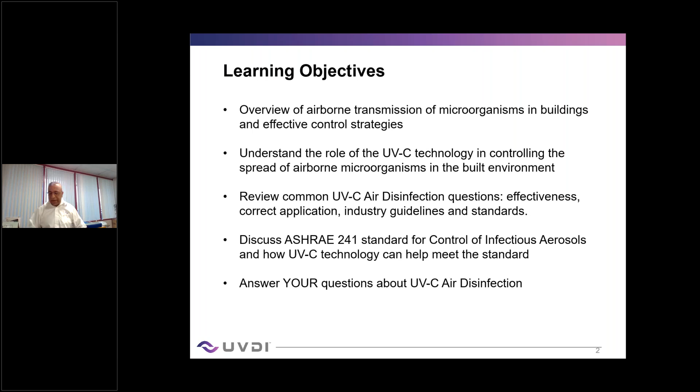So before we get going, I would like to do a quick poll, and I'll hand it over to Dave to run that first poll related to this. Thanks, Ashish. As you can see, our first poll is going to be, what do you see as the greatest benefits of UV technology? And please select your top two. I'm going to launch the poll here, and you'll be able to respond. I'll give you about 15 seconds or so. So please select the top two, and then we'll review the results.

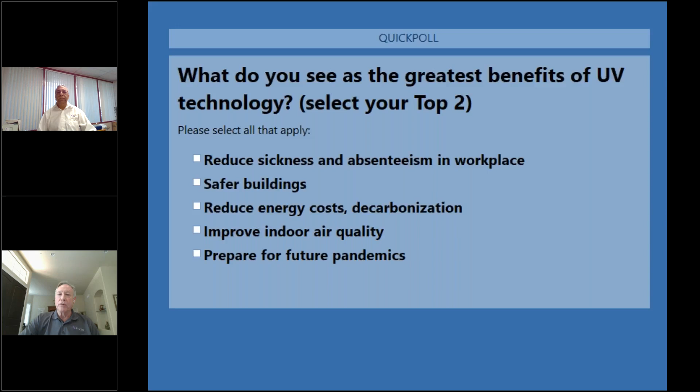So as we can see, top one, improve indoor air quality as one of the top benefits that you see for the use of UV technology, with reduced sickness and absenteeism right after that, but a good mix of all of the items that are here. And these are topics that Ashish is going to be covering throughout the presentation. So I'm going to close out the poll and turn it back over to Ashish.

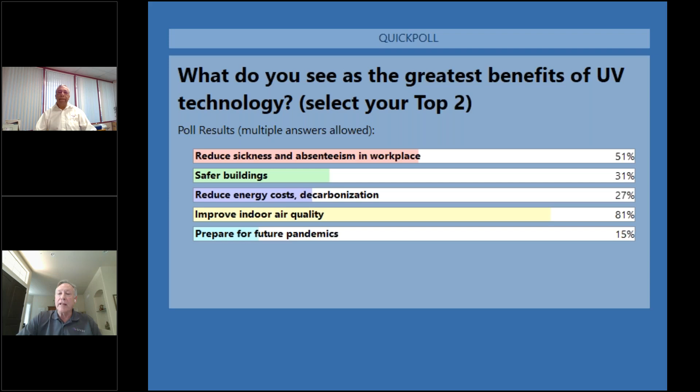Thanks, Dave. And actually, this was a really good response and good understanding, because when you go back a few years, even before COVID, UV technology was always like a value add or a value proposition, and it was more about, okay, am I saving energy? Only then I'm going to apply UV. But now the focus has shifted, and people are more concerned about indoor air quality. It has really come center stage, and of course, affecting the sickness and absenteeism at the workplace.

And I think the reason is, when you go back 40, 50 years ago, indoor air quality was not so much of an issue because we were naturally bringing in fresh outside air and diluting the concentration of the biological contaminants and chemicals that were trapped inside the building envelope. But now that we are spending more time inside, and the buildings are being built so tight, and we're not bringing in enough fresh outside air to dilute these contaminants, it's becoming a concern. Studies have actually shown that the air inside our homes is 2 to 5 times more polluted in terms of biological and VOCs and odors compared to outside.

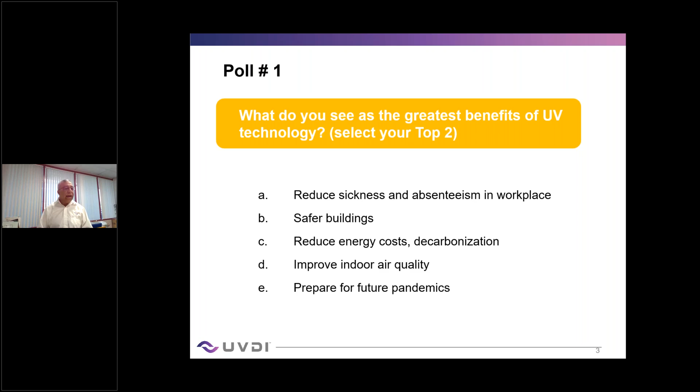So to understand the transport mechanism of these microorganisms, we need to understand the size. So this air contaminant chart shows relative sizes of the different types of pollutants which are found indoors and outdoors. If you see the scale of this chart at the bottom, it's in micrometers, which is 1,000th of a millimeter. So when you compare it to the size of a human hair, which is around, say, 60 to 100 microns, spores are big in size, 10 to 30 microns. Then you have the bacteria, which ranges from 1 to 10 microns, and the viruses get into the less than 0.1 micron.

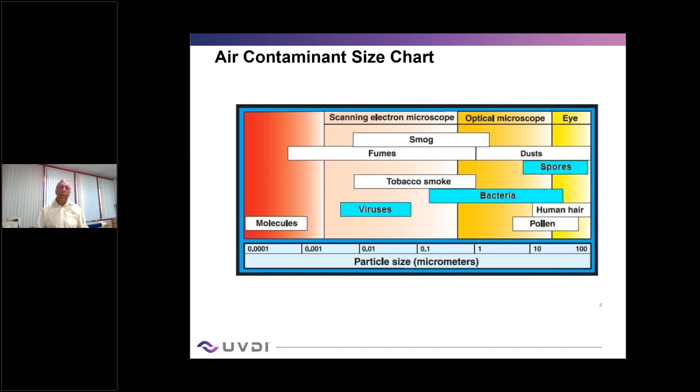So there's several studies which talk about what are the microbial contaminants in buildings, and this is a list which has been generated from all the studies. And you can see pretty big names there. I'm not going to read all of them, but there's a whole category of bacteria. Some of that stuff is coming from outside. Some of it is growing inside the ductwork. Some of it is growing in the coil. Viruses are, of course, coming from outside and being circulated inside the building as the occupants may be infected and the air is circulating. And of course, hopefully, the mold and fungus is only coming from outside and not from inside. But Aspergillus niger is really at the top of the list, where we've heard of some hospitals which have closed down because of Aspergillus niger outbreaks.

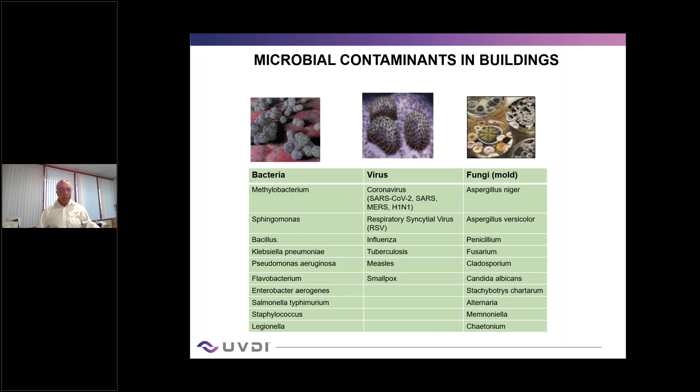Then, of course, we have SARS. So initially, people were saying that SARS is only surface, and then there was some concern about, is it really airborne? But since then, there have been several studies which have shown that SARS-CoV-2 can actually be transported and transmitted through the HVAC system. The presence of SARS-CoV-2 has been reported at several locations along the HVAC system in the air return and supply pathways, including multiple locations in the air handling units.

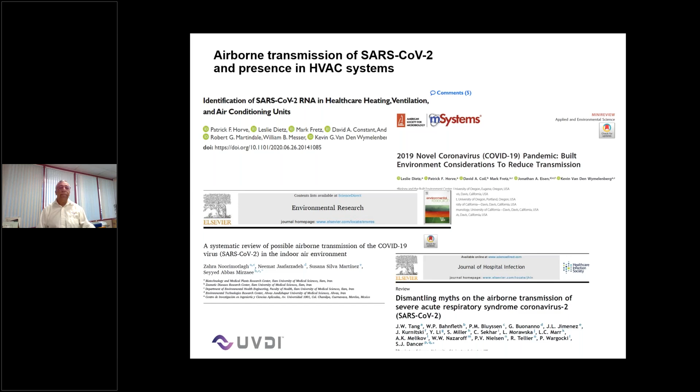So when you look at the different vectors of microorganism transmission inside buildings, again, like I said, there are different particles and the mode of transmission is different. Airborne transmission is mainly due to aerosols, where the small particles are carried and transported by the air currents to large distances and linger in the air for long periods of time.

Droplets, which was initially the case, droplet transmission is typically short distance, where droplets are transmitted as projectiles to people, surfaces, and objects only in the immediate vicinity. And I think the rule of thumb was 6 feet, and that's why we had that 6 feet distance rule proposed by the CDC. So droplets don't really linger in the air, and the size dictates how long they can remain suspended in the air. But these droplets can really dry out, and as they dry out, then you have the aerosol which gets transmitted.

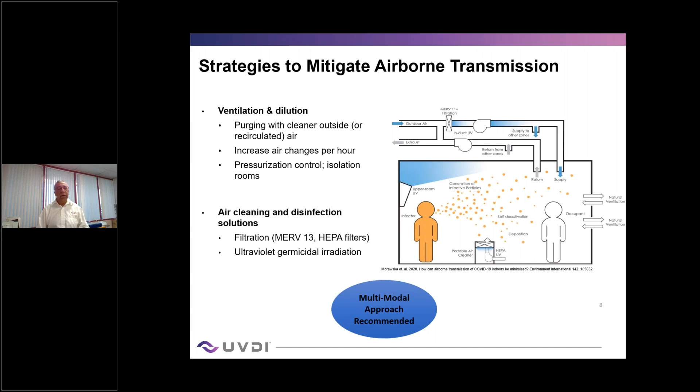So Pacific Northwest National Lab, which is affiliated with the Department of Energy, has been evaluating GUV over the past couple of years heavily, and you can see some of their communication on the internet. And they've recognized that GUV offers benefits as a more effective and energy efficient alternative over increasing ventilation loads above code limits. So 62.1 gives you a basic ventilation limit. This is what you need to have, and that's kind of prescriptive.

But if you need to go above that for any control of infectious aerosols or to get a higher air quality, you need to look at other technologies. So what GUV offers is an alternate to increasing your ventilation load. So you provide the code level, maybe you don't have to go above it. So use GUV as a more effective and energy efficient alternative to, for example, disabling demand control ventilation.

There is also a decarbonization opportunity, especially in northern climates. If we can avoid increasing the amount of outdoor air that we're bringing in above code, that's directly related to fossil fuel heating. And for those out there that may be involved in building electrification efforts, we see a potential benefit of this technology as well, whereby reducing the outdoor air ventilation load, you're going to reduce the required size, cost, and infrastructure requirements of, say, a commercial heat pump, potentially making that electrification measure to replace a fossil fuel heating system with an electric heat pump a more cost-effective solution.

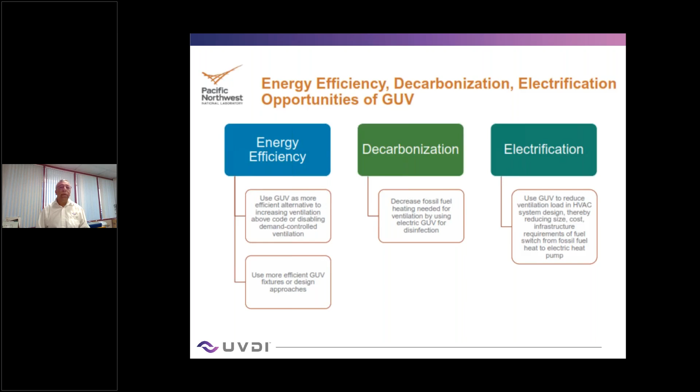So there are numerous published studies demonstrating the effectiveness of UV technology in improving air quality by disinfecting the airstream, whether it's in the duct or at a room level. So here you can see the applications. Of course, cooling coil disinfection has been the first and the foremost application for applying UV inside buildings because the cooling coil harbors a growth of both bacteria and even mold.

Air disinfection solutions for UV can be applied inside the central air handling system or inside the duct. So if you don't have the space or you're only focused on a certain part of the building, then you would just install the UV system in the duct. And then at a local area or a room level, there's upper air UV and ceiling mounted UV, which has been used. And of course, the advent of room air purifiers, which include UV as a technology, is also used.

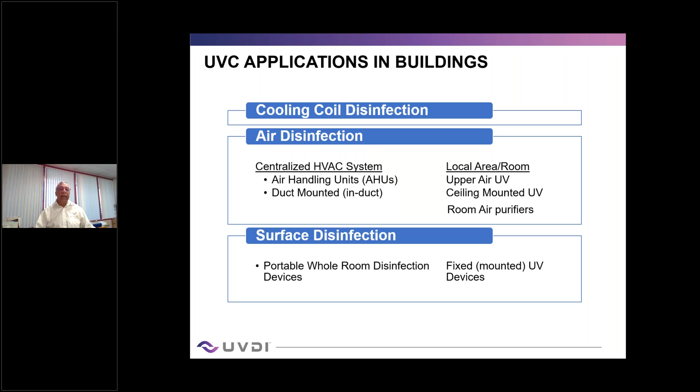And then inside buildings, especially in healthcare, you have portable whole room disinfection devices, which go in and treat the whole surfaces of the room. Or you can mount a UV in your ceilings or on the walls to get the UV disinfection. So here are some pictures. This is a cooling coil, and you have a UV system in front of the coil, which could be designed to just treat the coil, or to treat the air, or both. And this is a picture of how lamps could be installed inside the duct, where the lamps are ideally placed parallel to the duct.

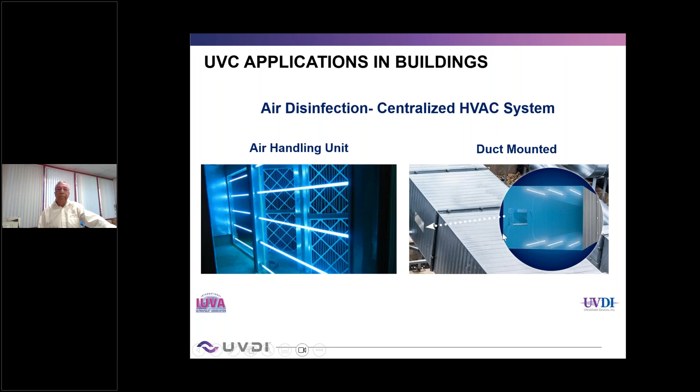Here's a picture of an upper-room UV application where you can see that the UV fixtures are installed only above 7 feet in a room, and they're only shining in the upper part of the room because UV is harmful to eyes and skin. So there are louvers on these fixtures which are only focusing on the upper air of the room and disinfecting the air on the top.

Or you could have ceiling-mounted UV lights. Depending on the wavelength you have, you would have to have effective safety interlock switches to turn them off as needed, depending on the occupancy in the room.

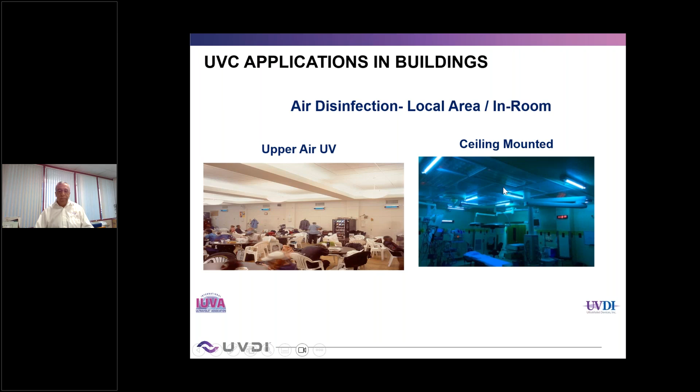Okay, you can see the poll here. The question is going to be, do you currently use or specify UVC for air disinfection? And we have representatives from users, owners, facility management, as well as engineering firms and distributors. So it could be a different type as far as whether you're specifying or selecting. And we want to just get a sense of that. So I'm going to share the poll, and we'll have about 10 or 15 seconds. And please select one for this poll.

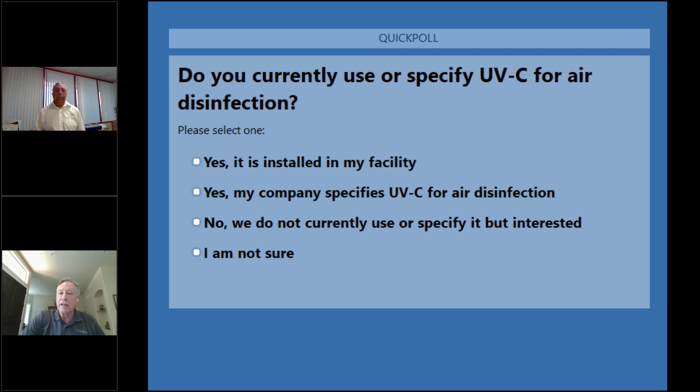Okay, so it looks like number one, yes, my company specifies UVC for air disinfection. Great to see. Yes, and we can see about 13% do have them already installed in the facility, and a large percentage that are not currently using but are interested in. And we're hoping the information we provide for you today is going to help you answer any questions you might have related to that. And also, for those of you who are not sure, that's really the main purpose today for us, is to give you as much information as we can to help you understand the value.

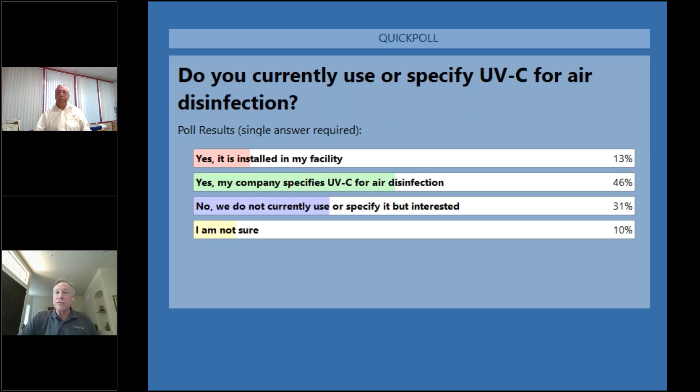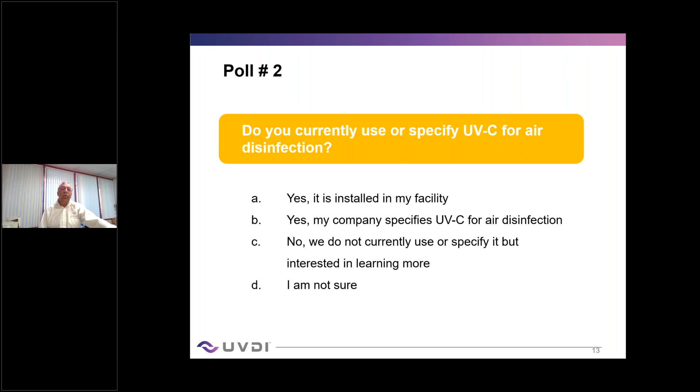Right. So that's a good mixed response from the audience, and hopefully the next few slides will help people who are new to UV and people who are not sure about how to specify UV, and give some high-level information. And of course, later on we can get into more details on a one-to-one basis.

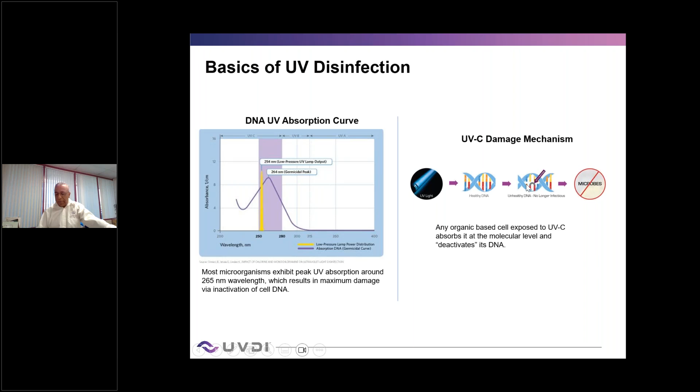The mechanism is pretty well documented and proven: if you look at the DNA or RNA structures, when UV light shines on it, it basically breaks one of these bonds inside, and it prevents the DNA from replicating. So if it stops replicating, the cell basically dies and cannot reproduce anymore.

So there are so many studies out there, and since it's a proven technology, I don't really have to get into too much detail on this, but there are several studies which have correlated the benefits of UV technology to workers' health and well-being. There have been studies done by EPA, a couple of studies in the last year by the EPA Indoor Air Quality Group on UV. The World Health Organization, CDC, they all have documents and guidelines to prevent the transmission of tuberculosis. And then, of course, when SARS-CoV-2 happened, there was a flurry of research activity confirming that UVC is effective against SARS-CoV-2 and similar viruses.

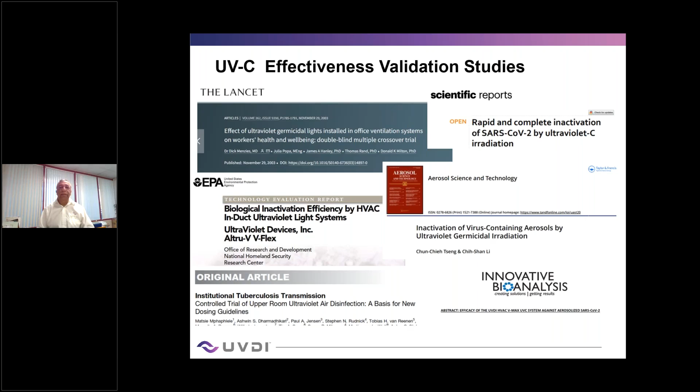So while the DNA structure is damaged by UVC light, the susceptibility is affected by the unique shape, sizes, cell structure. All these microorganisms are different. So it's not just the size, but it's also the photochemistry, the cell chemistry on absorption. So even though they're all affected by UVC, relatively, some are easier to kill and some are more difficult to kill. For example, viruses are, I would say, easiest to kill, followed by bacteria and then mold.

So if you look at these, what is the UV dose required for a 99% kill or inactivation? And you look at these numbers, you can see SARS-CoV-2 actually is one of the easiest to inactivate compared to other microorganisms. And the studies which were done in the past few years have confirmed that you just need, say, a dose of 1222 microwatts per centimeter square to get 99% kill for SARS-CoV-2.

And we've always been modeling our airstream disinfection system using influenza because every year we have the seasonal flu, and that really requires a much higher dose compared to SARS-CoV-2. And then bacteria and mold, of course, the mold is orders of magnitude over this. So they are susceptible at different degrees. So when you look at how do you size a UV system, you have to really look at, am I sizing it for viruses or am I sizing for bacteria, or do I really want to size it for mold? So it's important to understand that.

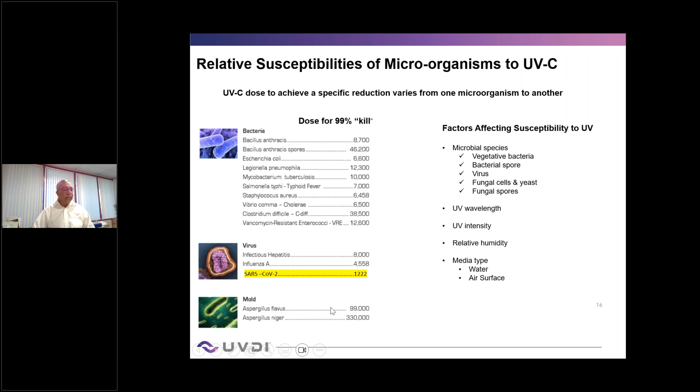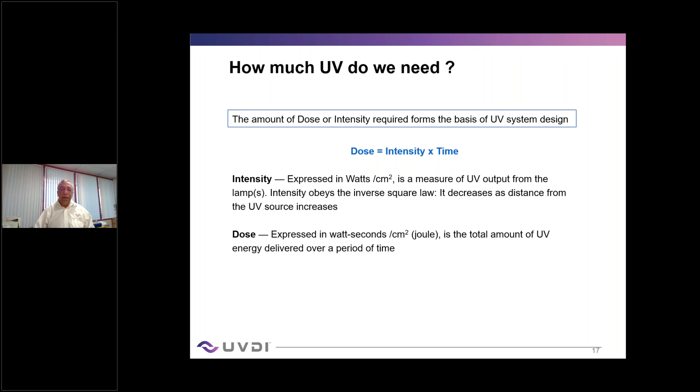So which brings us to the most important parameter which you design a system to, and that is the dose. The UV dose is the single most important requirement. The dose applied is the cumulative intensity reaching the target area multiplied by the exposure time. So to increase the dose, you can either increase the intensity by increasing the number of UV lamps, or you can increase the exposure time or dwell time. Keep in mind that in an airstream application, air is moving pretty fast at, say, almost 400, 500 feet per minute. So your exposure times are less. And we'll get into that a little bit later.

So here's a quick summary of the main differences between a coil and an airstream disinfection. In coil disinfection, you have a coil and the lamps are just in front of the coil, and you have pretty much an infinite amount of time to disinfect it. So you don't need a whole lot of UV. In fact, the ASHRAE guideline says that if you can have an average intensity of 50 to 100 microwatts on the coil surface, that's fine, because these lamps are on 24/7, and the light will focus on the coil, penetrate through the fins and take advantage of the metallic reflectivity inside the coil to get to that higher dose level over time.

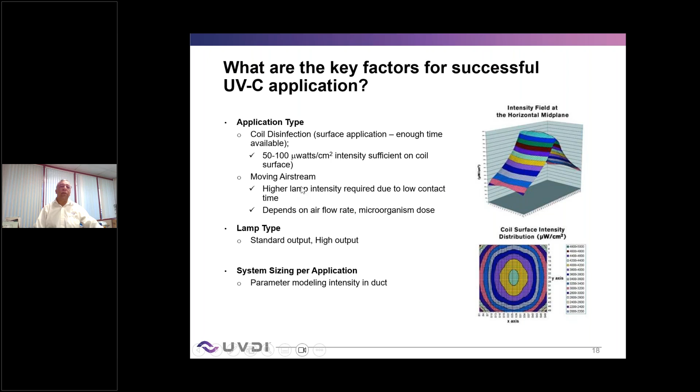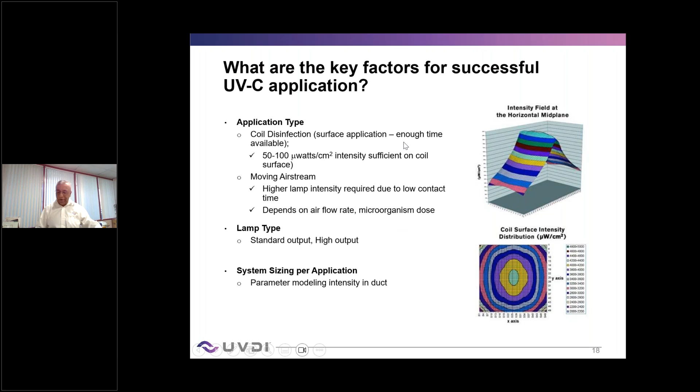On the other hand, airstreams, like I said, 400, 500 feet per minute in the air handling system, or even up to 1,000 feet a minute or higher in the duct, you don't have that much exposure time. So when you look at sizing a system, it's not the same. Of course, you have to look at the lamps. Some lamps have lower output than others, and that will have an impact on the energy. So for a coil application, you can decide which kind of lamp is more effective. Maybe you need 10 lamps which are standard output, but you can do the same thing with 2 lamps which are high output. So you can design it different ways. So modeling a system is really useful in figuring out the best way to design the system for that application.

So ASHRAE formed an epidemic task force during COVID, and as a result, they came out with some standard guidelines for how much UV dose you need for in-duct air disinfection, and what dose you need for SARS-CoV-2. I showed you the number in that susceptibility chart for SARS-CoV-2, it was 1200, but basically what they're saying is if you have a minimum of 1500 microwatts of UV dose applied in a 2 feet region, that would be sufficient for sizing the UV system for airstream disinfection.

And over the last couple of years, CDC has come out, and I wouldn't say endorse it, but they've updated their ventilation guidelines, and they talk about using UV as an effective mitigation strategy. So they talk about in-duct UV as well as upper air UV as an effective mitigation technology.

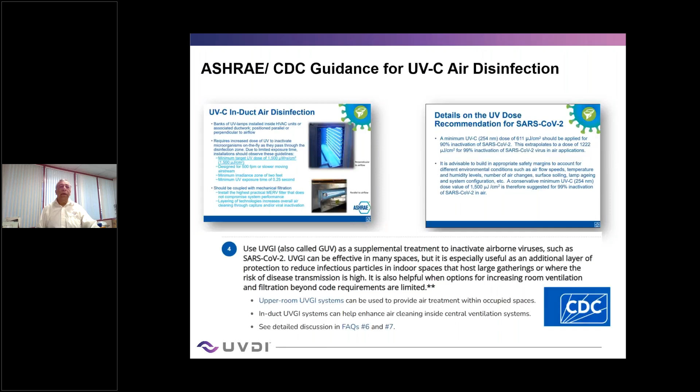So time to do another poll, Dave. All right, thanks, Ashish. Okay, on this poll, the question is, when you're looking at using a UV system, how do you specify that? You follow industry guidelines, you have a system provider representative that you work with, you hire a consulting engineering firm, you might have another way, or you may not actually be specifying it yet. I'm going to launch this, and we will go about 10 seconds. So please provide your response to this one.

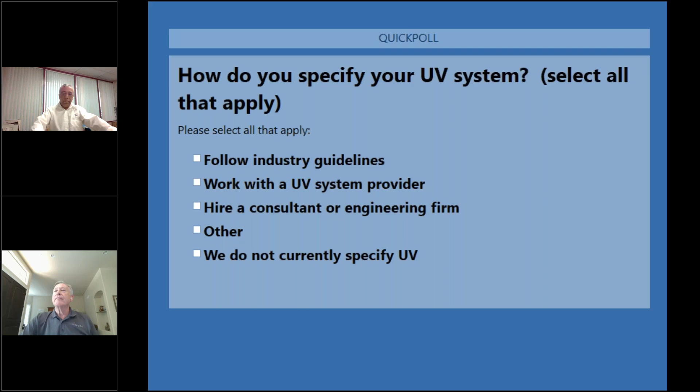Okay, I'm going to close and share the results. So it looks like over half use a UV system provider, work with a representative or perhaps engineering firm, and then followed by looking at industry guidelines. And then we do get a good sense of people who are not currently specifying them. Again, the information we're providing today, we're hopeful that you'll be able to use that. I'm going to close out the poll and turn it back over to Ashish.

Thanks, Dave. So I think what we're finding is the pandemic unfortunately spawned a lot of new startups and companies who have provided unvalidated systems and misapplied the UV. So we've seen specs which are really designed for coil disinfection, but the claims have been made that they will also do airstream disinfection, which is not really true.

So for illustration purposes, this example below, like I said, ASHRAE says for a coil application, you just need, say, 100 microwatts. So if you have 100 microwatts, and you look at an airstream application where the air is moving at 500 feet per minute, that applied dose is only 24 microwatts, whereas the target is 1500. So there is no way you can get the dose you need to get a decent amount of UVC disinfection for airstream. Even if you go 10 times, 100 to 1250, your dose is only 300. So it still falls short of what you need for air disinfection.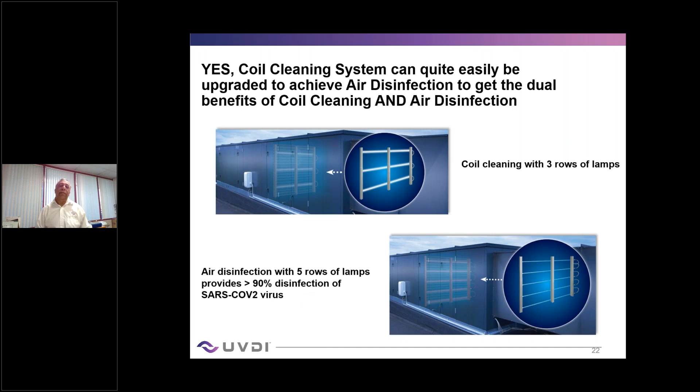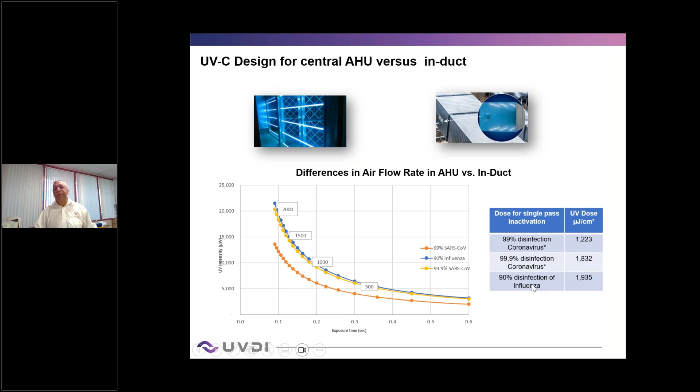So what are the key parameters that impact UV intensity? We talked about microorganisms. There are some new technologies out there with different wavelengths, so you want to make sure that the system is sized for the output of that lamp, whether it's an LED or far UV or some other UV source. The configuration of lamps in the space, and wind chill is important.

This graph shows that the velocity in the duct and the air temperature in the duct has an influence on the lamp power. So when manufacturers like us are designing systems, we factor in the temperature of the application, installing it close to the coil where the temperatures are different compared to something way downstream of the duct. The humidity levels and the reflectivity available in the duct also have an influence. So all these parameters are important.

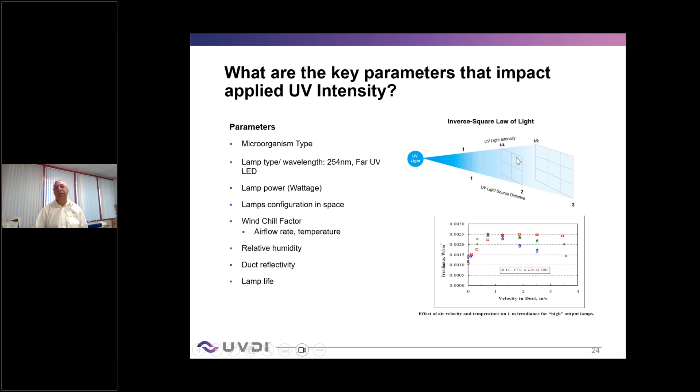And the most important thing is, like any light technology, UV follows an inverse square law. You go further away from a light source, the intensity drops. So if you go twice the distance from a light source, the intensity drops to 1/4, and so on and so forth. So modeling is important.

You can't just say, okay, I got so many lamps and this is my total output which I'm sizing. It also depends on how you're placing the lamp. So the modeling really helps figuring out what is your intensity or dose profile inside the duct. So here's an example which shows that here the lamps are spaced evenly along the duct. So these are in the corners and you get a fairly uniform profile versus if you bunch all the lamps in the center, your distribution inside the duct is much narrower and not uniform.

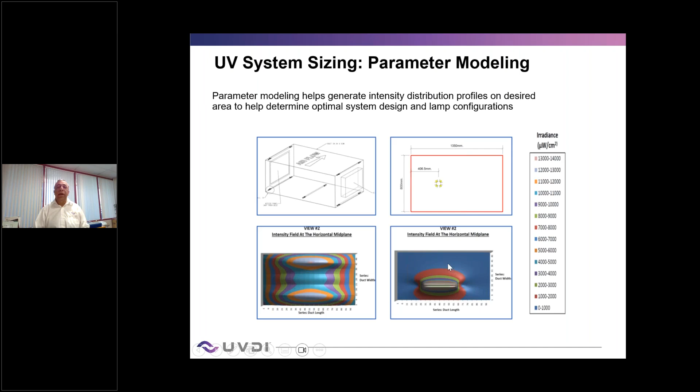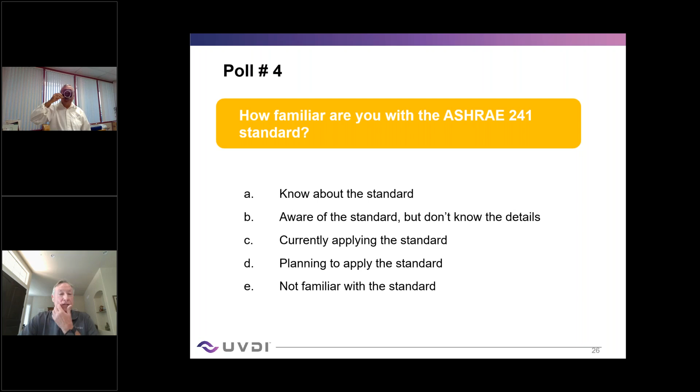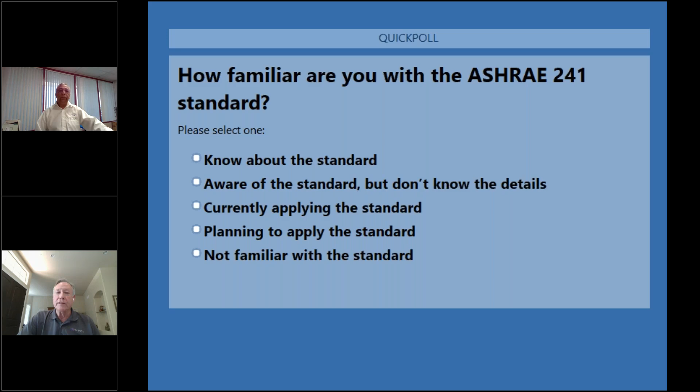I see the responses coming in. It's great. Okay, we are going to close out and I will share the results.

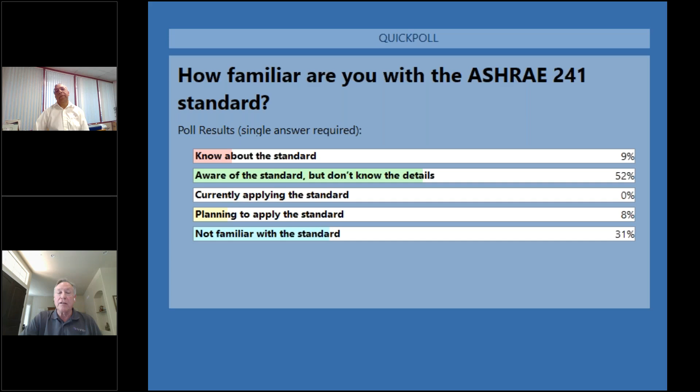So it looks like over half were aware of the standard, but don't really know the details. And I think that's a typical category right now with it. And we do have a good percentage not familiar with the standard. So the purpose of the rest of Ashish's presentation is high level. There's a lot of details in it, and we're going to brush on the top of it. But it looks like most everybody knows of the standard. So that's good to see. I'm going to hide the results now and turn it back over to Ashish.

Right. Thanks, Dave. So yeah, this ASHRAE 241 standard was a really high priority effort from ASHRAE, driven by a request from the White House, and they formed a committee of really highly respected committee members, and they came out with the standard for the control of infectious aerosols in buildings. Until this, there was no standard on what building owners do to combat any infectious aerosol in a building and transmission. There was nothing out there.

So this standard was fairly quickly put together in a very concise way. So what it does is it establishes minimum requirements. What ASHRAE does, like some of the other standards do, they always establish minimum requirements. So what are the minimum requirements for control of infectious aerosols to reduce the risk of disease transmission in occupiable space of new and existing buildings? So it's a pretty important purpose.

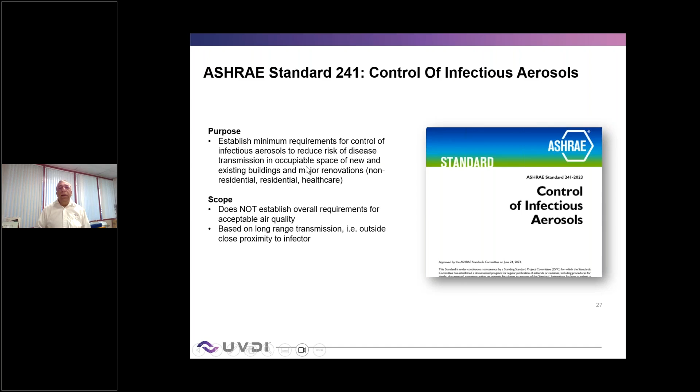So it's different from 62.1. It does not establish overall requirements for acceptable air quality. It's only focused on reducing the risk of disease transmission. If you really want to get into the details of 241, there are many presentations which you can access on the internet, YouTube, and Dr. William Bahnfleth and his team who spearheaded 241 have been really putting the word out. And there's also an ASHRAE learning webinar available on demand, which you can go and get learning credits for 241.

So some of the basics, important things are, it does not replace, it builds on the standard 62.1 for commercial buildings, 62.2 for residential, and 170 for healthcare buildings. So that's your baseline. So it says you got to meet all these requirements, and then on top of it, you need to put ASHRAE 241. And the main thing which is highlighted in blue is that infectious risk management mode. It provides additional ventilation requirements for periods of elevated risk.

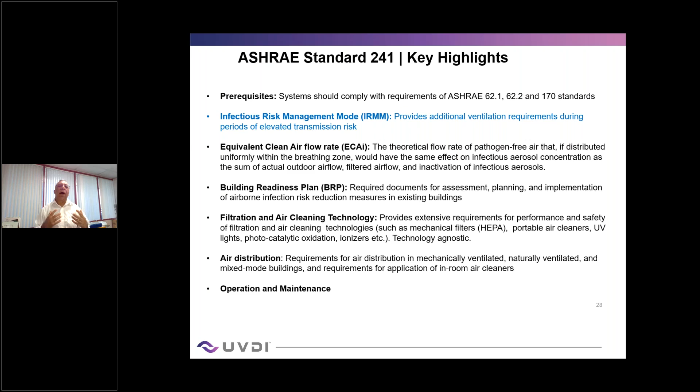And the metric which they're using is called the equivalent clean air flow rate, which is the theoretical flow rate of pathogen-free air that would have the same effect as bringing in fresh outside air. So it brings you the concept that you don't have to just rely on outside air. You can replace that outside air with maybe more energy efficient ways than just bringing in outside air. And then it gets into a little bit more details. Buildings need to have a building readiness plan, and then it goes into the different discussions on what are the filtration air cleaning technologies and how do you measure that, how do you calculate those things.

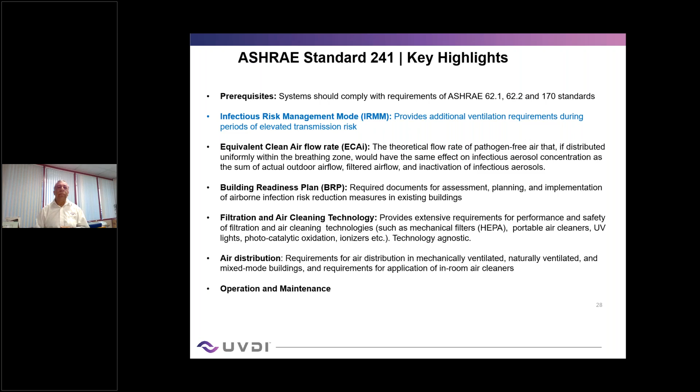So the important thing is, in a risk management mode, your occupancy could be different. So for example, when we were all working remote, you don't have to run that building full-fledged, right? The occupancy is less when people are working remote. So when you design your system to meet 241, you have to look at what is the occupancy. So what they've done is that they've said, okay, the equivalent clean airflow calculation is going to be based on your design occupancy, number of people present in the breathing zone.

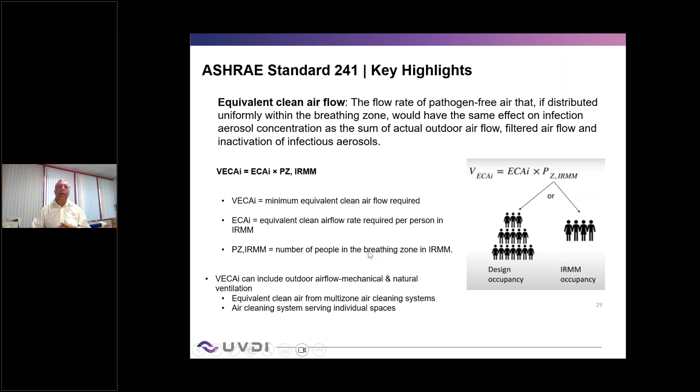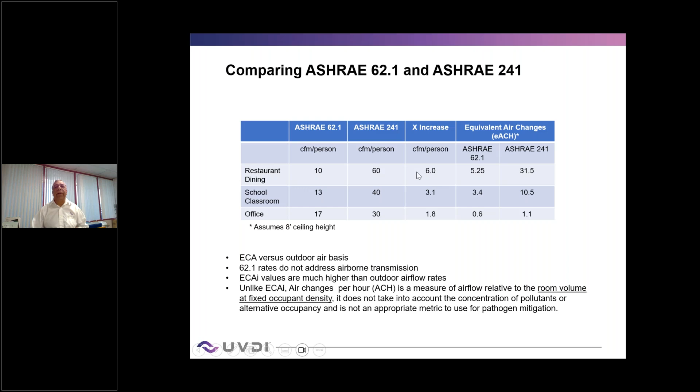So you can see that the increase is pretty significant. For a restaurant application, it's six-fold. And the columns on the right show you the equivalent air changes per hour related to that. So 62.1 does not address airborne transmission. 241 does. So you need to take that into account.

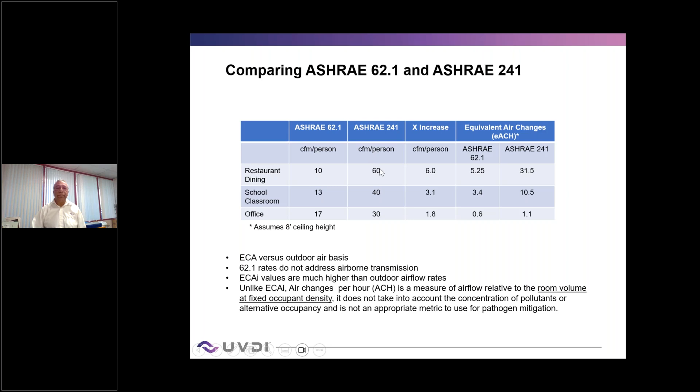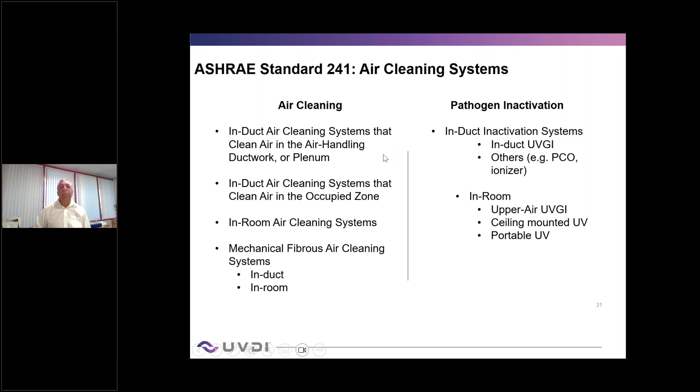So what 241 says is you can replace the outside air by a combination of different technologies. You can have in-duct air cleaning systems, filters, and in-room air cleaning systems, filters, or you can do pathogen inactivation by in-duct UV, which we just talked about, or in-room UV using upper air, ceiling mounted, or portable air cleaners employing UV technology and other technologies. So it allows you to reach that equivalent clean air goal by combining these systems.

And in addition to performance, they say, okay, how do you test your system to make sure that you meet the equivalent clean airflow rate? So they've chosen a microorganism, which is MS2 virus, which has to be tested according to whatever available standards there are. So for UV technology, for airstream in a duct, it's 185.1. And for a room, they have something in the normative Appendix A.

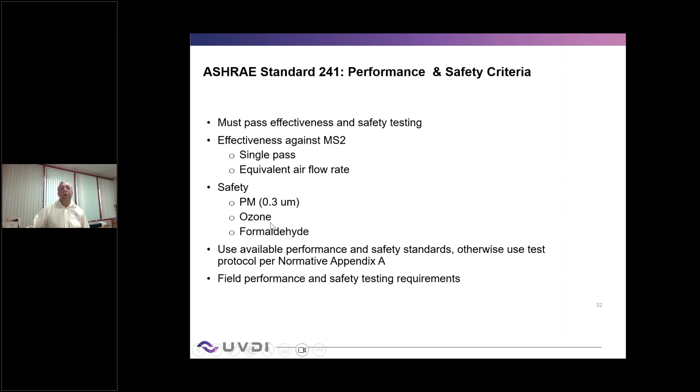And then in addition to performance, you have to look at safety as well. So whatever system you apply, make sure you're not exceeding the limits for PM, ozone, and formaldehyde levels as defined in the standard. They also show a calculator where you know what is the outside air, and then you can look at the contributions of the different technologies, sum them up, and it will tell you whether you pass or fail.

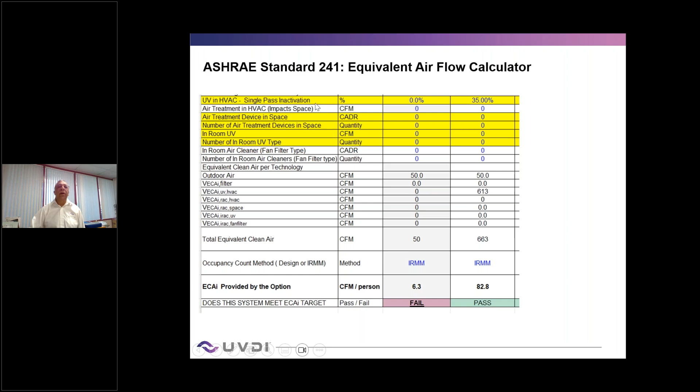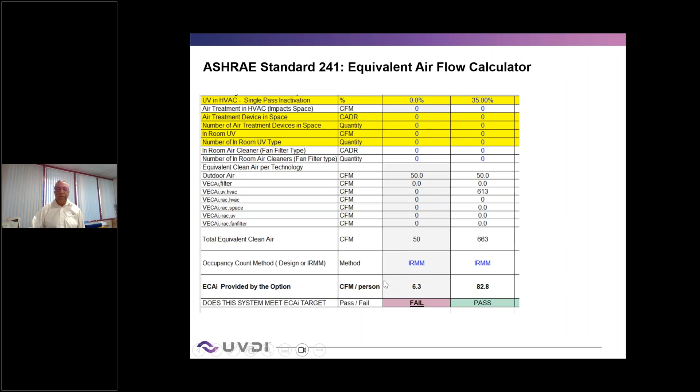So in the calculator, it says, okay, UV in your HVAC system, in your duct, what is your single pass inactivation? And that will give you some points, and it will calculate that equivalent clean air CFM based on those numbers. If we have UV in the room, whether it's in the form of an air cleaner or upper air system, you can add those things here, and it will count towards your final equivalent clean air.

So again, PNNL lab, like I mentioned earlier, they are currently doing studies, and they basically said, okay, you have all these things at your disposal: outdoor air, filtration, in-duct UV, upper air UV, portable air cleaners, ceiling mounted UV. These are your tools in your toolbox which you can apply for this.

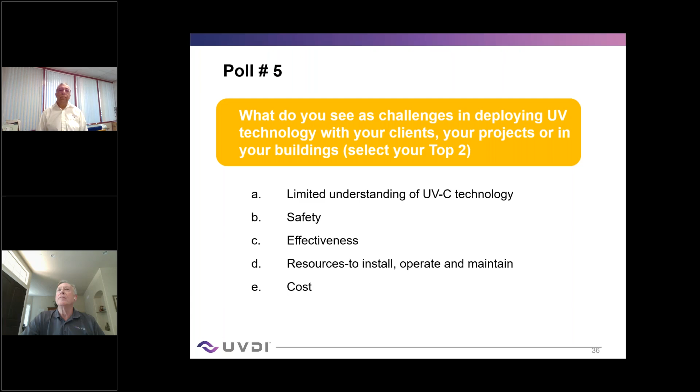Looks about the same between limited understanding of UVC technology as well as resources to install, operate, and maintain as two of the challenges. Hopefully, some of the information we provided today will help with the understanding of it.

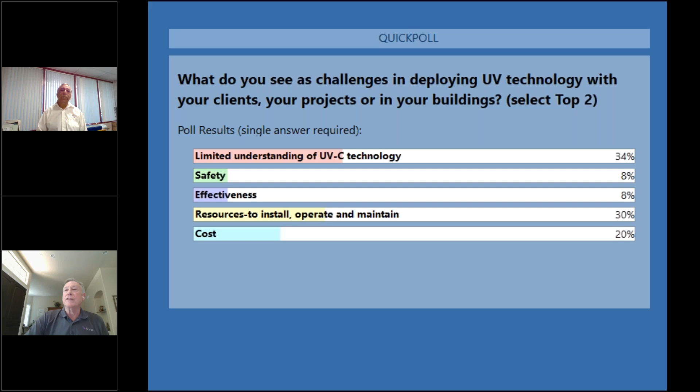So we're going to close up by saying that, in summary, UV technology is a proven technology. It's been validated and it's recommended by ASHRAE and CDC and other organizations. It can be effectively applied not just for coils but also for airstream disinfection in an HVAC system and for in-room disinfection. And to have a successful implementation strategy, you've got to make sure that you're sizing your system correctly, installing it as per the manufacturer's guidelines, and following the applicable regulatory and safety standards.

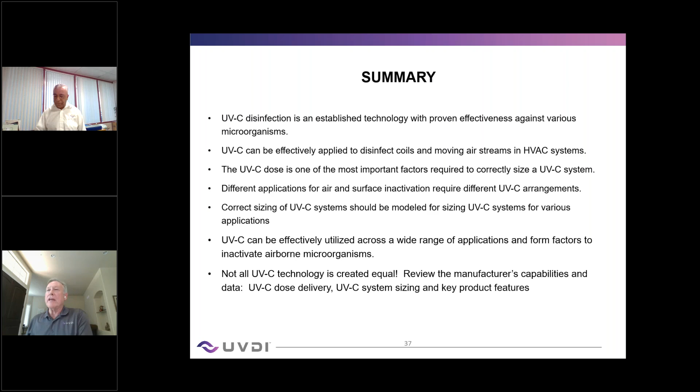Where can the ASHRAE 241 equivalent airflow calculator be found?

So you can access ASHRAE 241 or you can purchase it. And if you go to one of the appendixes, towards the end of the appendix, there is a link to the calculator. Actually, if you go on the ASHRAE website and you put in 241, you'll see it. But I have your email address. I can send you the link to that calculator, Tyler.

Okay, thanks, Ashish. Next question: the doses that we were talking about in slide 16, what are they displayed in? The question had mJ/cm2, but I think it was microwatts per centimeter square. It was microwatts per centimeter square. Yes, people use different terms. That slide had microwatts per centimeter square. Some people use millijoules or other units of measure, but that particular slide was a 99% dose based on some published studies in microwatts.

Okay, great. Next question from Robert. What happens to viruses that are captured by filters? So yeah, it's a really good question, and it's a very common question. So like I said, if you have a fairly decent filter upstream, before your coil system, if it's a MERV 8 or 11, as you saw in the air contaminant chart, it's not going to hold the viruses. Even a MERV 11 may not be sufficient for a virus. ASHRAE 241 actually is saying you need 11 or higher, and even a 13 is recommended for that.